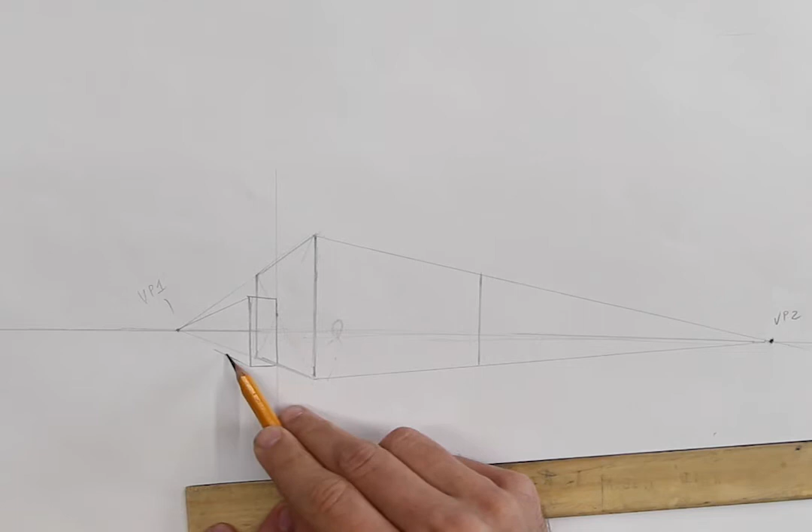So there we go. I'm adding a little room that's going to come out that's half the depth of that front face of the house. So these vanishing points are going to come down like this. Just building a box in here like that. I'm wondering where the back end of this is going to be away from me, so I'm taking what I know, which is the back corner of this. I'm extending that, attaching that to the vanishing point, and extending that out, and that gives me the footprint of this addition I've just added onto my house.

Now I go straight up, and I have a front plane like this. There. So there's my kind of one-story add-on. So I'm going to do that, divide that in half, raise my pole up, and that gives me the center of that if I want to put a gable on there too. So I could have a smaller gable back there and a bigger one up here.

So something like this might look okay. And then come down the other side like this. So there is my gable, with the farther side of the gable looking illusionistically smaller than the front; as things come toward me, they get bigger. Great. So this also is going to come up and down, back toward the vanishing point.

And now I have built in a little add-on. Huh. It's a bit smaller than I wanted it to be, that add-on. Not to worry, I can just extend it out a little bit. I can just add on to each of these lines.

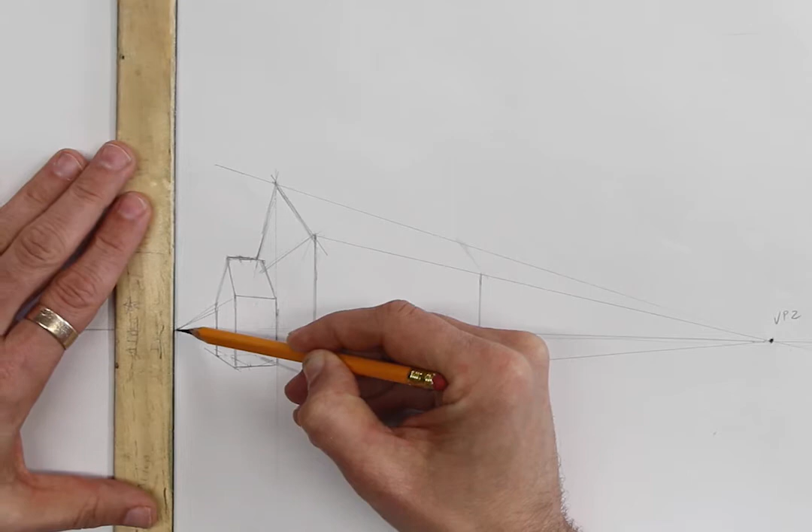Another way to do this that gives you more variety in your angles is to run. So this is my eye level, my horizon line. This is my vanishing point. I raise a vertical straight up, and I find a spot on here where this diagonal hits that up here. And this is my oblique vanishing point 1. So I have vanishing point 1. Directly above that in the air, I have oblique vanishing point 1.

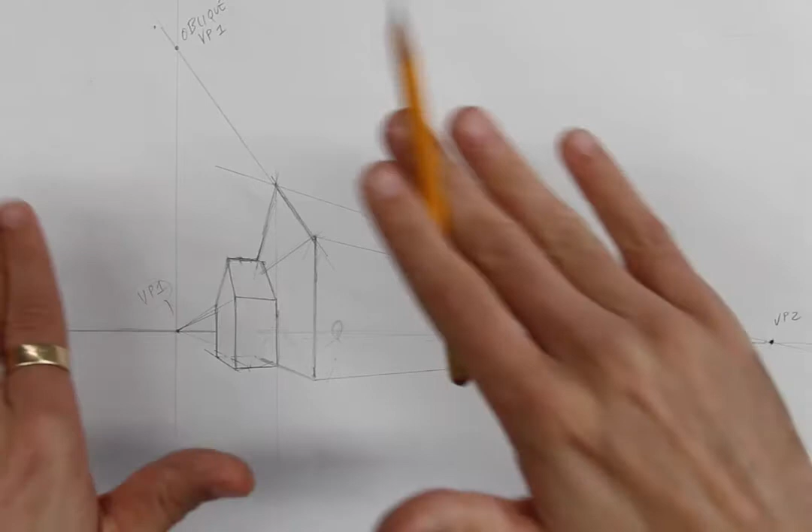And this crosses like that. So anything that is parallel to this roof is going to shrink to there. So I have all my planes that are on the ground going to these two, but my roofs, if they're parallel to that one, are going to go there. And look how different this angle becomes as that goes back. So as I'm working into the distance, this actually starts to really change its angle. So let's see, was I accurate here? Oh look, I did that one just by intuition. How's this?

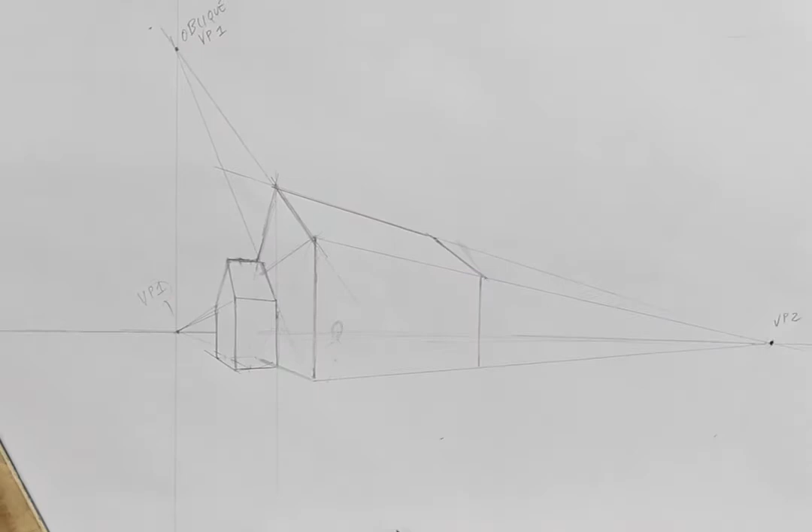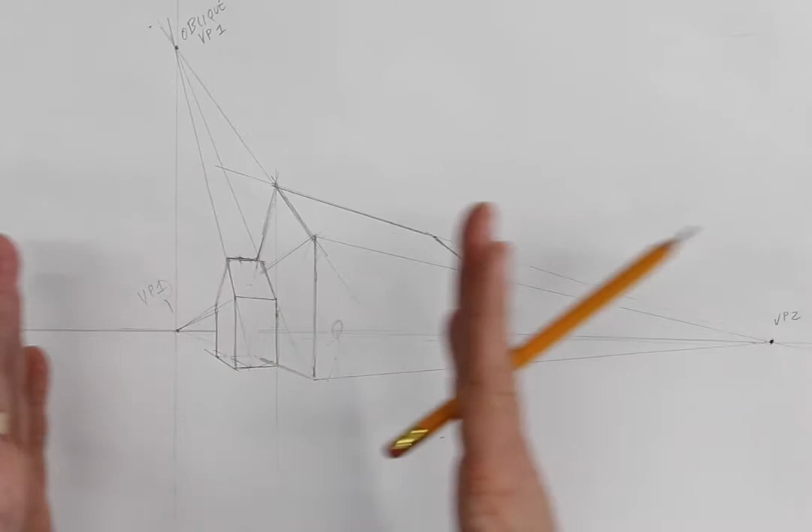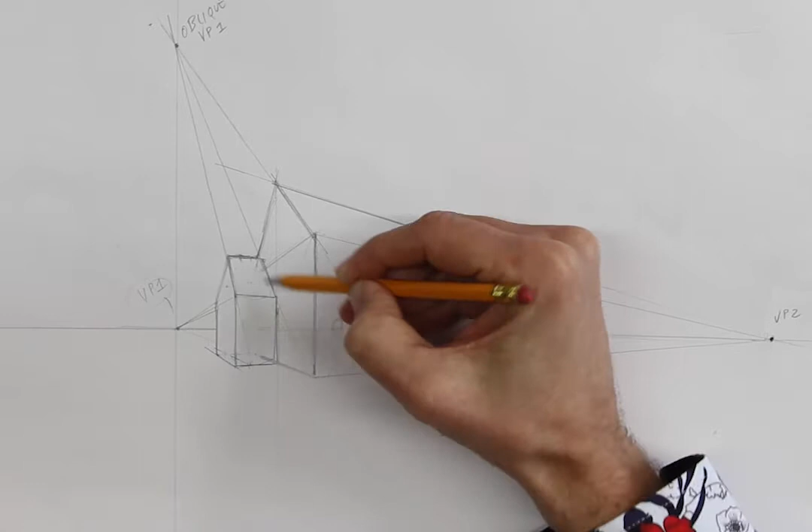Also good. So I have made this roof parallel to that one, and yet the angles are all different, and that gives you the sense of, oh, I'm looking to the right, I'm seeing a different kind of angle than as I look to the left. Things are actually squaring up to me. If this roof was right in front of the vanishing point, I'd start getting into like 1 point perspective, and these would be really squared up, and I wouldn't be seeing anything from this side. So it's really cool how you imagine as things move in front of the different vanishing points, and you can actually feel them turn. So getting a sense of that is really helpful. So there we go. Good. So far, so good.

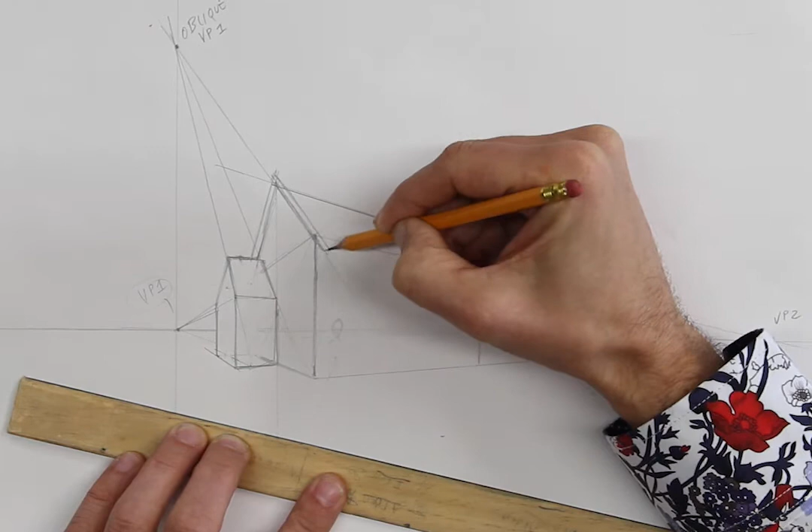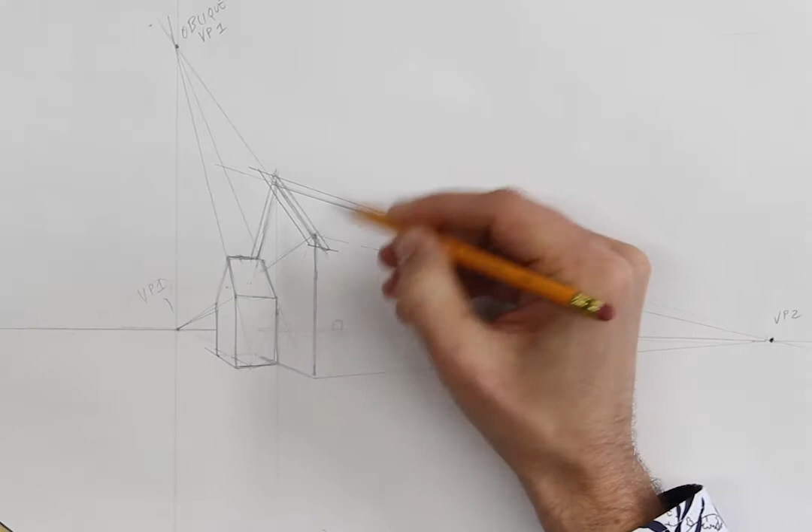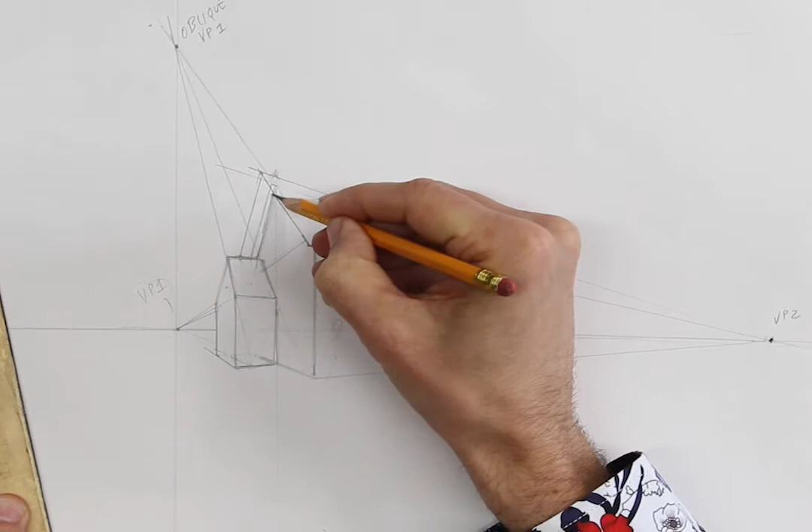I like to do things like build a little shape here on my roof. It's going to overhang the wall. So right now, that is just flush with the end wall, not giving me my eaves hanging out. But then I can project that shape forward like this. Use this oblique vanishing point again. So now I have an overhang. Let's get rid of some of the stuff hidden here a little bit so we can see this more clearly. So look at this. I have an overhang coming in front of the wall, so that when the rain comes down, I have a little bit of an overhang to keep me dry.

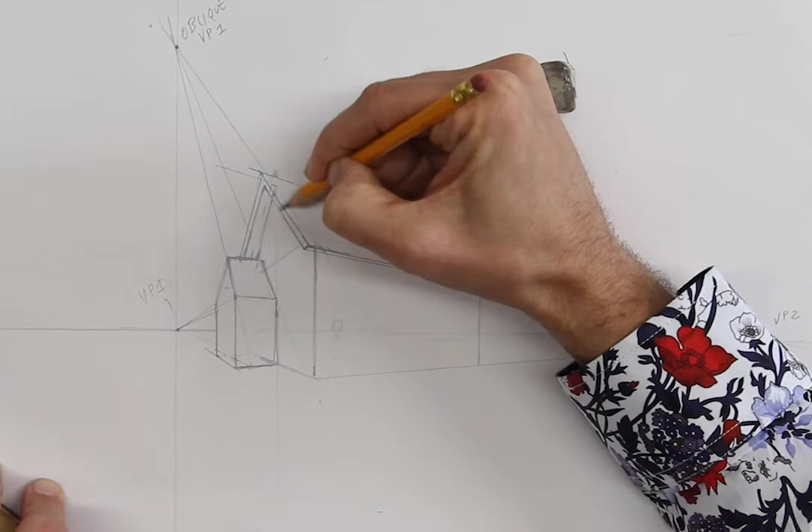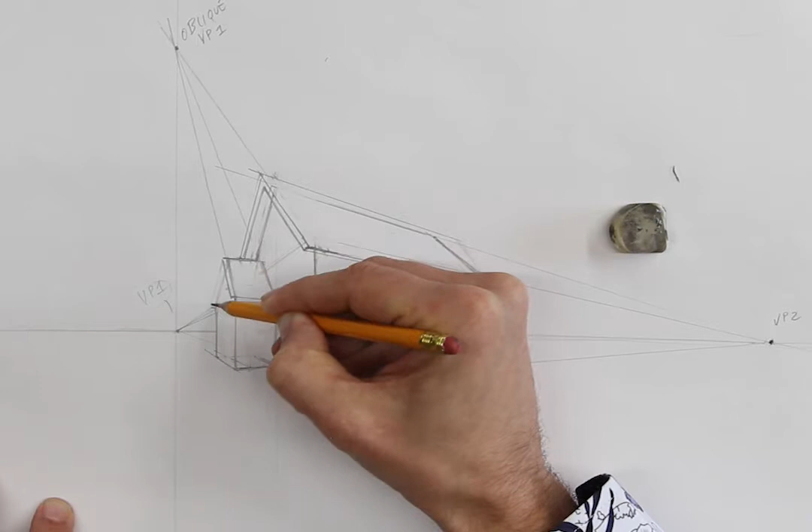It's easier to do at this end because I just need to bring that down. So there we go. But yeah, sometimes I make a little template on the ground to project things up. In this case, I made a little template on the roof and then projected forward the overhang using the vanishing point. Good, looks nice. Yeah, could do the same thing here. Bring that forward. This is going to stick out. Bring that down. So there we go. That adds a sculptural quality to it.

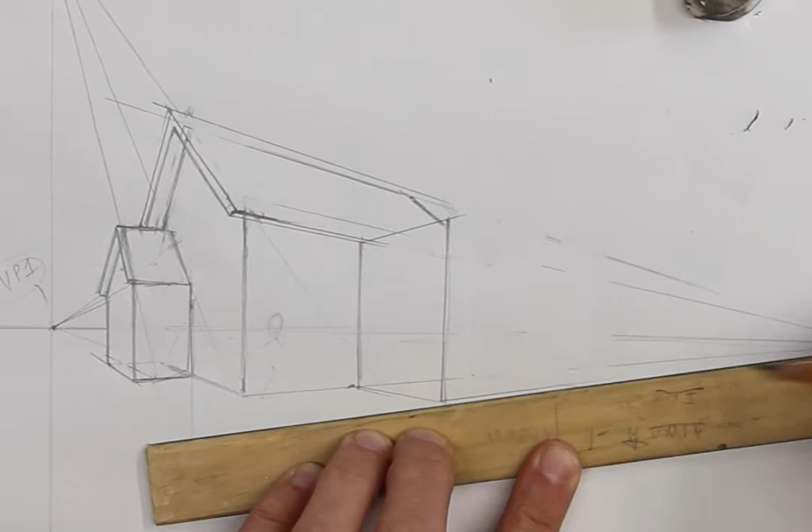Okay, yeah, let's make a more interesting shaped house. Let's drop a corner in here. So we have this box running that way. We're going to bring a box forward, outward. I'm thinking about where it meets that wall. So I don't want this to dwarf the part of the house that I already had. So I'm going to shrink it back a little bit. It's kind of funny. I had to grow this one. I have to shrink this one just to get the look that I want. Not a big fan of the monster house. But also not a fan of boring shapes. So we'll try and get this in here. There, I think that's going to work. That's a little more in proportion.

So again, corner to corner to find the midpoint. Put my pole up from my midpoint. So you notice this is larger than this, right? Things are shrinking as they go back. Makes sense. I'm going to just build a gable here. Now it doesn't have to match this because it's going different angles. So it's on its own trajectory there. That's okay. Now I'm going to bring this roof back to the vanishing point.

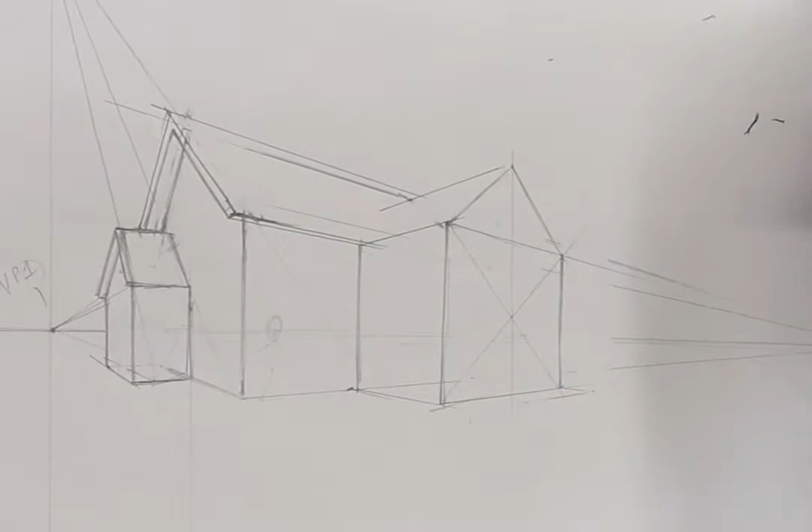Now here's one where there are complicated ways to figure out this angle, but this is a tricky part. And I'm kind of just going to eyeball it now to keep things simpler. But this is at this angle, this is at this angle, and somehow you just kind of go in the middle of those to feel how that would look going back on the roof. You can't match this, right, because it's being intercepted by this angle as this roof comes down. You can't match that, so I'm looking for something in between those two angles that can make it look like that is rising up to the corner there. Yeah, great. So that's looking good. I guess I haven't done my extra roof hangout. So, extra roof hangout.

Something like that. I'm actually going to push this wall in a little bit so that I get the hangout right at this corner where they meet too. That's better. So let's put a chimney in here. I am just going to make a footprint on the ground where I want the chimney to meet the ground here. Something like this. So I can imagine how that sits with space around each side.

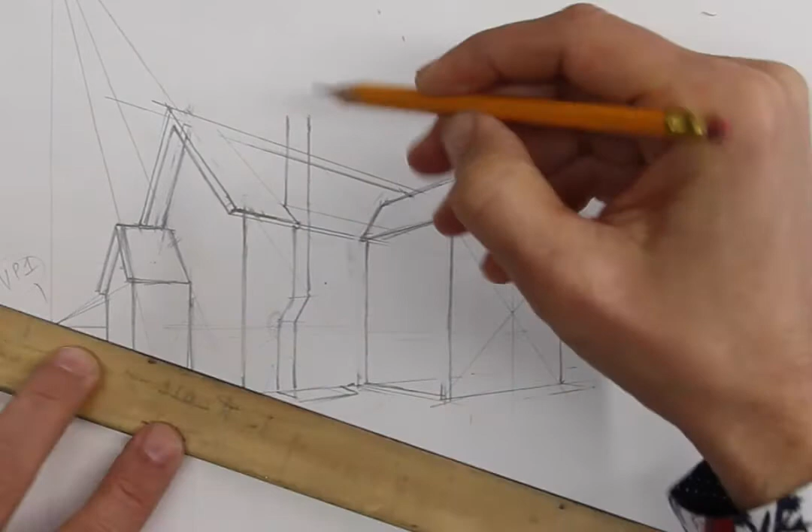So now I'm going to use my vanishing point to get the top angle. Look how steep that angle is, right? As I start to get up there above my head, I really cannot see the top of this chimney. It is quite a ways up there. So now my chimney comes down, down, down. I'm going to widen out a bit and come down to meet my footprint.

You know, let's put a pair of windows in here. Okay, we're going to put a pair of windows, and we're going to use this center point to make them symmetrical within this. So here I have a window like this. Yeah, that looks nicely in proportion. I suppose you could put a big picture window there, but this is a bit more fun to be able to do two. So now I'm going to, well, that's interesting. What am I trying to do?

Because my windows actually aren't centered. What I need to do is find the center height of this window. Put my guide through like this. Good. So this is the center point of that at the center point of this wall. Okay? So now I go like this. I go bottom, middle, top. So when that hits the top height of this, right, my window is going to be this high and this big at the bottom. So I take this, run it through the center line, like this, top, bottom, middle, top,